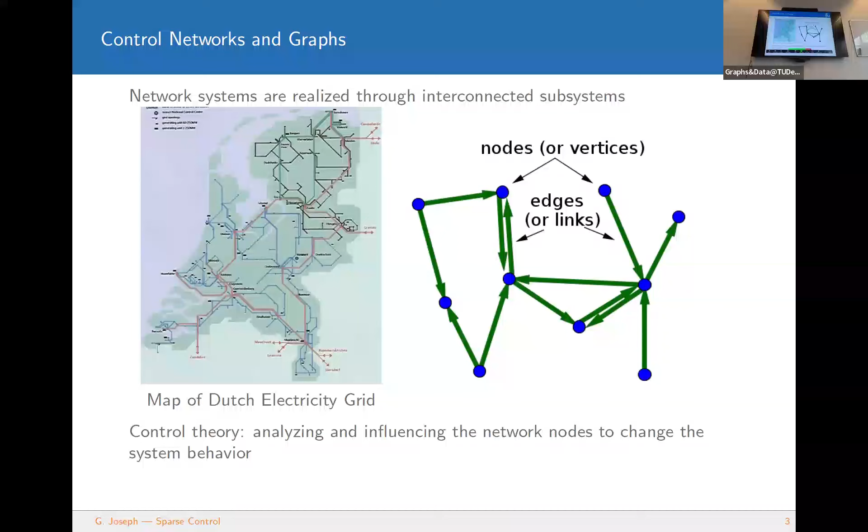We normally represent system evolution, or how the data changes over the networks, using a linear dynamical system. It's one of the simplest systems which can capture how data changes over time. We particularly stick to the state space model, which consists of two equations: a state evolution equation and observations. State evolution will tell how the state of the system changes over time, and here K represents the time index. Think about a network where xk corresponds to the signal that you observe at every node of the network, so the number of nodes will be equal to the dimension of xk. As time changes, the node values will change.

It can change due to two reasons. One is because of the interactions among the nodes: one node can interact with another and change that other node, and that interaction is captured by the first term here, A times xk minus 1. The second term, B times uk, is the application of external controls, something like applying a drug to your body, which changes the innate behavior of the system. So there are two components to state evolution: the first is an innate behavior, which is A times xk minus 1, and the second is external control, which is B times uk.

This can be easily captured using a graph. Think about xk as a vector, where one entry of xk represents one node in the graph, represented by the blue dots here. And xk depends on xk minus 1, the state of the system at the previous time, because the state is changing over time, and that dependence is captured using this matrix A. So here you can see that if the state of node, let's say, A32 is non-zero, which means that the state of node 2 will influence the state of node 3 at time t, that's why you have a connection which connects x2 and x3.

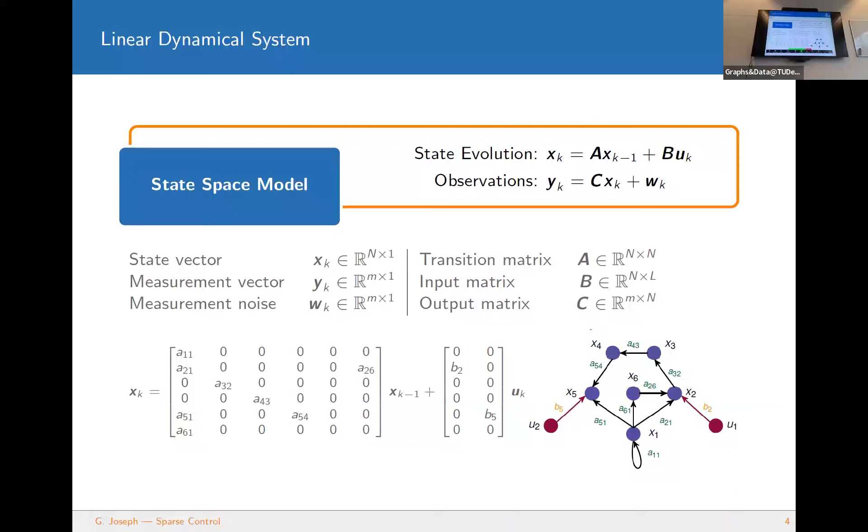Right, so to understand this, let's look at an example. Think of a social network. A social network is basically a collection of people. Here, a node represents a person in the network.

So every person has an opinion, and the collection of all the opinions will represent the state vector.

And then there is a transition matrix, the A matrix, which will tell how these people would influence each other. People will talk to each other, get new perceptions, new insights, and change their opinion over time. That is what is captured by this A matrix, which represents social connections. Social connections could represent people living in an area, people working for a company, or a social media group where people discuss things. It could represent different things in different contexts. So this A matrix represents these connections, how the different nodes are connected to each other.

And then there are some external inputs. External inputs could be social influencers, people who want to influence opinions deliberately. This could be a marketing agent who would come and talk to you about a particular product and say good things about it, or somebody who would give you a free sample of a product to test out and see if you like it or not. So these are some external inputs. These are not unbiased opinions, but people who try to bias people. That could be an example of a social influencer.

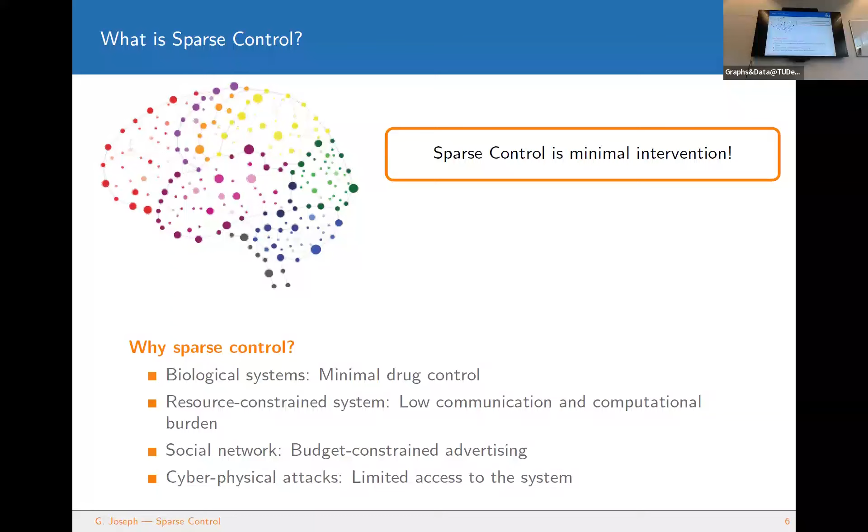Oh, now it should work.

And what is sparsity? Sparsity basically represents a control vector with lots of zeros. Think about a system with a lot of actuator possibilities—for example, the social network case, a lot of people, and you want to pick and choose a few people who can influence the entire network. The people you would choose will have a non-zero control and the others will have zero control. For example, a kindergarten child will have zero control because he has less influence in society compared to somebody like the dean of electrical engineering, who will have a better say in certain things.

So basically, if you look at the control vector, it's a big long vector with mostly zero entries, which means most of the nodes are uninfluenced and only very few will have non-zero entries. That's one good thing about sparse control itself—it admits compact representation. If you want to represent a big long vector, you don't need to store all of them; since most are zero, you can store it very efficiently. That saves, for example, low communication costs when you try to transmit over a band-limited signal.

So what does this talk discuss? This talk is about sparse control in discrete time linear dynamical systems, where we ask the following questions. The first question is: we have a system with a lot of actuators, a lot of possibilities to control the system, but we use only a few of those options. Does it actually work? Is it possible to get any desired behavior, or is it possible to control the system using only a few nodes? That's the first question we want to address.

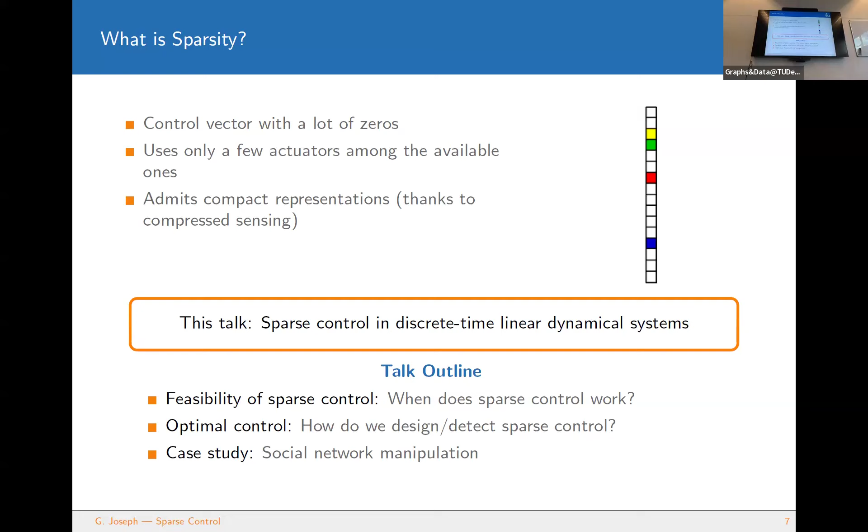We also look at a small case study of social network manipulation using sparse control. So this is how we have organized the talk for today. Any questions so far? All right.

Okay, let's revisit our math equations. We work with a state space model, where we look at the state evolution equation, described by x_k equals A times x_k minus 1, plus B times u_k. We are looking at sparse control, which means we assume u_k, the control input, is sparse—meaning the L0 norm of u_k is much less than the size of u_k itself. We can think about two types of sparse control: one is time-invariant, and the other is time-varying support.

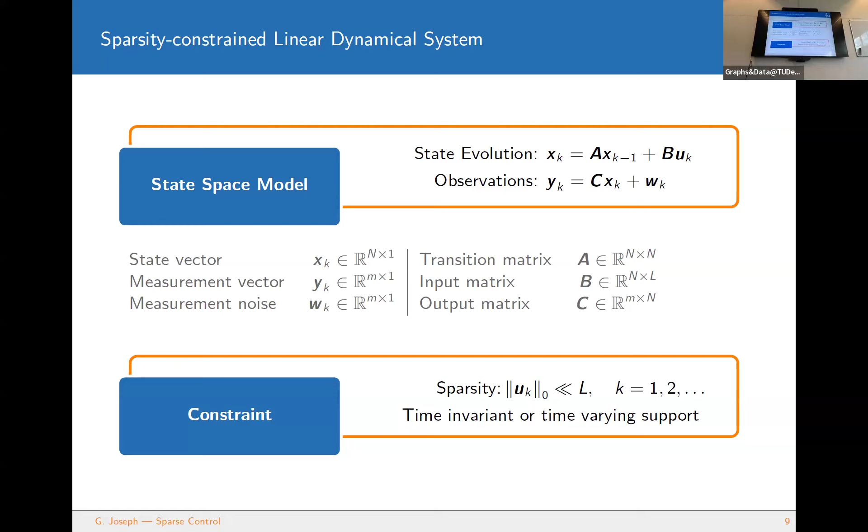In the time varying case, people can choose different non-zero values across time. At first time, we pick 3 people and make sure everyone else is 0. The next time, we influence 3 different nodes and make sure everything else is 0. So you choose fewer people, but over time you choose different sets of nodes. That is what we mean by time varying case, versus time invariant case where we just pick a few among all available options and always use non-zero control only using those nodes. These are the two different cases we're going to discuss today.

Let's start with the formal definition of controllability from the control theory literature. Given a linear dynamical system, it is said to be controllable if using a set of admissible controls, we can start from any initial state x0 and achieve any final desired state. If there exists such control inputs, then we call that system controllable.

Mathematically, let's say you start from x init, the initial state from which we are starting, and we want to move to x final, a given final desired state. For example, in the case of a marketing agent, before the product is launched, nobody knows about it, and you can think about the state of social opinion as a 0 vector. Your goal, x final, is to make sure everybody buys it or has a good opinion about it. So you can have a desired final state.

If you use the linear dynamical equations, you can see that x final and x initial are related with the control inputs using a matrix called the controllability matrix. This matrix has different powers of A, with terms like A power K minus 1 times B, A power K minus 2 times B, all the way to B, where B is the input matrix and A is the transition matrix.

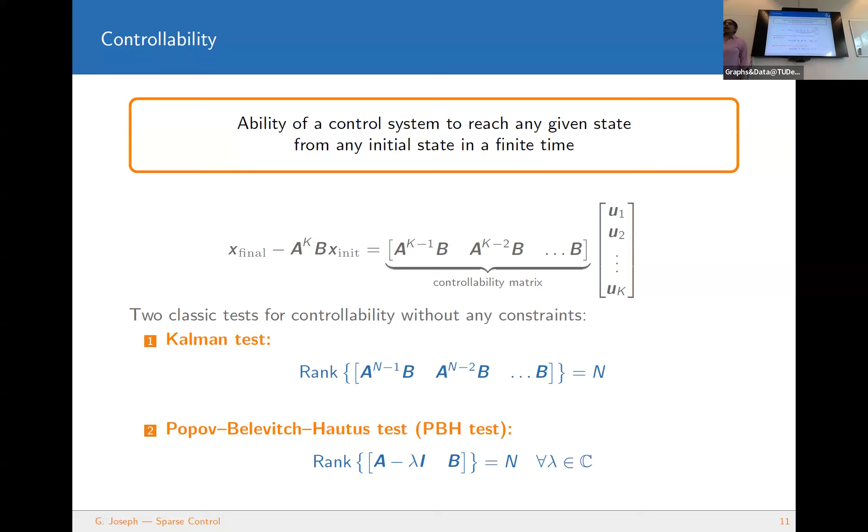We'll first look at the time invariant case, which means all the UIs will have the same support - the non-zero entries will have the same indices over all the UIs. So what happens in that case? Let's assume the support of UI, meaning the indices of non-zero entries of UK, is fixed - that's a set S, a subset of all possible options.

So you have n entries in UK, and we choose a small subset of that, activating only those subsets every time. What happens is you can replace U1, U2, all the way up to UK with only the non-zero entries, because all other entries are zeros, and when multiplied with this matrix, they have no effect.

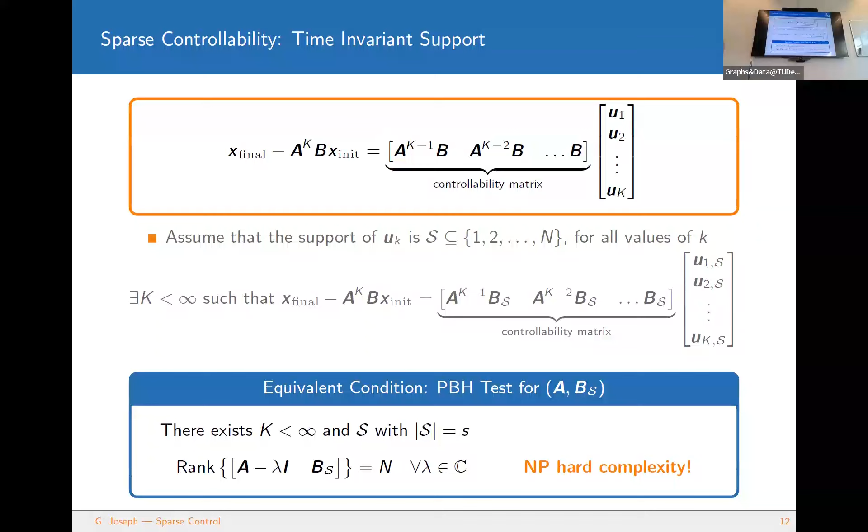And if you want to check whether it's possible to control the system with N_S inputs, then we have to check whether there exists an S such that this condition is satisfied. That is a straightforward extension of classical control theory. But this works only if the support is time invariant, meaning we choose the same subset of actuators at every time.

Now let's look at the time varying support case. Here, each of the UKs is sparse, but they have different supports, and the supports can change over time. Let's say the support of UK is SK, which depends on K, and we'll look at the controllability condition here. Every time you choose a different support, the first B gets replaced with B sub S1, the second B gets replaced with B sub S2, and so on. Therefore, it doesn't have a pattern similar to what we had earlier.

We want to make sure that there exists an S-sparse vector which would attain controllability. So this system of equations should be solvable for some SK. That's the goal that we have, and we have different options for SK.

If you look at the span of this matrix over all possible values of SK, then we get a finite union of subspaces, which means at one time you can pick a fixed number of supports, so we can choose S1, S2, all the way up to SK minus 1. That will give you a matrix, and it will have its own column space. Then we have different options for each of these SKs.

If you have n entries and you choose S out of n entries, there are n choose S options to do that. So for every different option of SKs, we can construct a different controllability matrix, if your only constraint is that your UK should be sparse. So for every UK there can be n choose S options for its support.

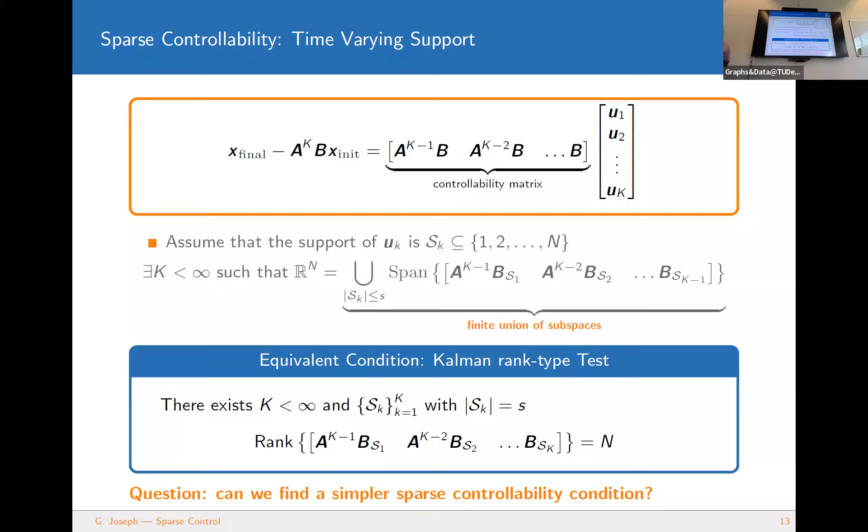But there is a problem with this condition: it's hard to evaluate. If I have a system and I say I want to check whether it is S-sparse controllable, I have to run through all possible supports to make sure the condition is satisfied. This could be a combinatorial problem. So can we think of a simpler, equivalent condition where we don't have to do a combinatorial type of check? That's what we try to do next.

So for that, we look at some necessary conditions. Think about sparse controllability - it means a system is controllable using sparse inputs. If a system is controllable using sparse inputs, it should be controllable without the sparsity constraint, because controllability is a looser version compared to sparse controllability. If you can achieve something with an extra constraint, you should be able to achieve it without that constraint as well. So sparse controllability naturally implies controllability.

And therefore, we know that if the system is controllable, the PBH test should succeed, because that's a test to check whether the system is controllable or not. So we try to work on this.

Let's say a system is sparse controllable. We see that if the system is sparse controllable, the Kalman type test in the lower box should be satisfied. So if the Kalman type test is satisfied, there exists a K and a set of supports such that the rank of this matrix is equal to n. Look at the first few columns of this matrix.

We have an A sitting on the left side of all these columns, so we can say this part is A times some other matrix. In other words, the column space of the first few columns of this matrix is a subset of the span of A. So if I replace the whole thing with A, the rank is not going to reduce. So if the rank of this matrix is n, I can clearly say the rank of this first bunch of columns, replaced with A, should also be equal to n.

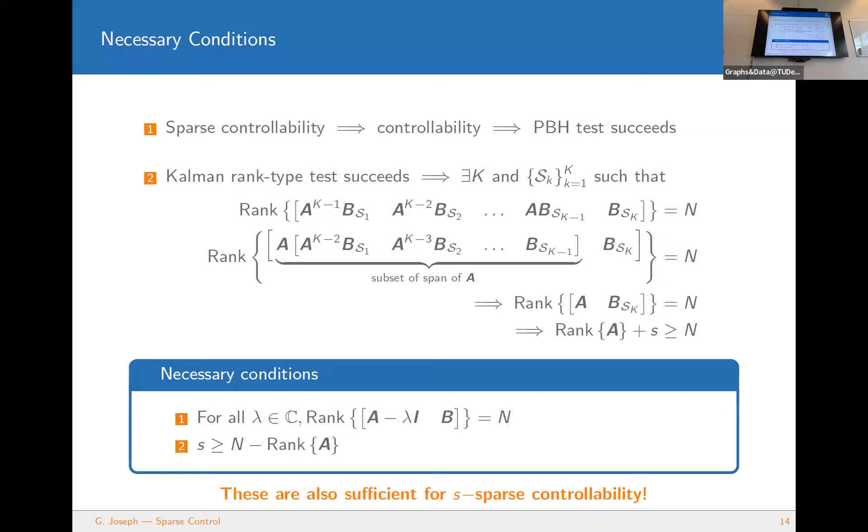However, this condition is only necessary - it's not sufficient. But we can prove that it is also sufficient. I'm not explaining the proof here, but we can show that these conditions are also sufficient for sparse controllability, which could be a bit surprising, but it's a very easy proof.

So to summarize, what we show is that a system is sparse controllable if and only if it satisfies two conditions. The first condition is controllability itself, which is pretty clear. The system should be controllable, and the sparsity level should exceed a particular level, which is the nullity of matrix A.

This is similar to the classical PBH test, and it is easy to verify. There is no combinatorial check.

So any system which is controllable is also sparse controllable, as long as sparsity exceeds a particular level. That's the takeaway from the discussion so far, which is a beautiful result because it tells us what is the minimum number of people that I should influence to make sure that I achieve a desired behavior, or it gives insights into how I design my sparse control if I want to achieve something.

If you go below this level of S less than n minus rank of A, then the system can be uncontrollable.

This leads to a couple of other interesting results, which I'll skip for today. For example, this can give something called a Kalman decomposition type procedure, which can separate our system.

Suppose the system is not sparse controllable, then we can separate the space into three different parts. One part which could be controllable. So let's say our S is less than n minus rank of A, which means the system is not sparse controllable. Then we can clearly identify which part of the system is controllable, which part is not controllable, and which part is not sparse controllable. So we can divide the whole state space into three different parts.

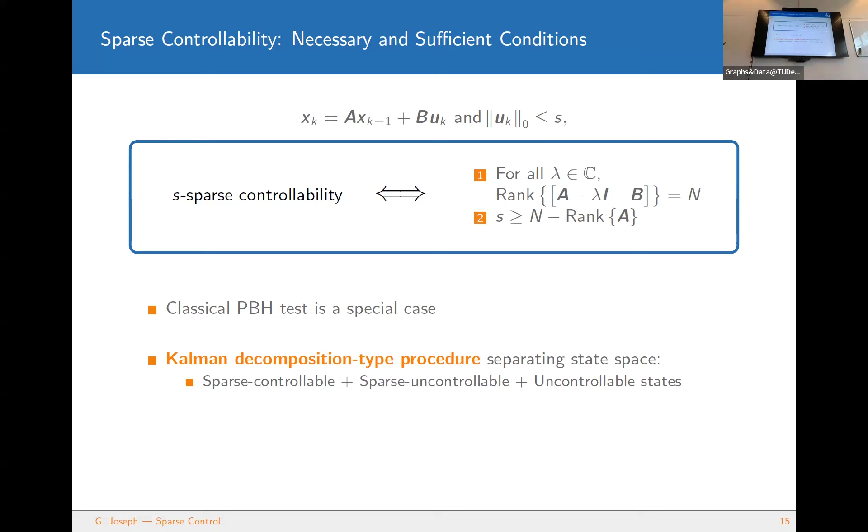I'll not go into the details, but this is one result. And we can also derive the number of inputs that we need to guarantee controllability.

So if you know that a system is sparse controllable, the next question is, what is the minimum sparsity level that we need? The next question is, how do we design the controller? How many control inputs do you need?

So that you can start from one initial state to arrive at another state, which is equivalent to this capital K in this equation. So how many control inputs should we apply? And there's a bound for that as well.

Interestingly, this is upper bounded by capital N, which is the state dimension of the state space. So if you're trying to control a system with n nodes, then we need to apply at max n sparse inputs to make sure the system arrives at a desired behavior.

That's the takeaway of the system. And this also matches the non-sparse case. So if we have a non-sparse system, where you can apply any number of control inputs, then n is the upper bound in that case as well. In the classical non-sparse case also, the bound is n.

If you have a sparsity constraint, even then you need at most n control inputs to ensure the system starts from a given initial state and arrives at another state.

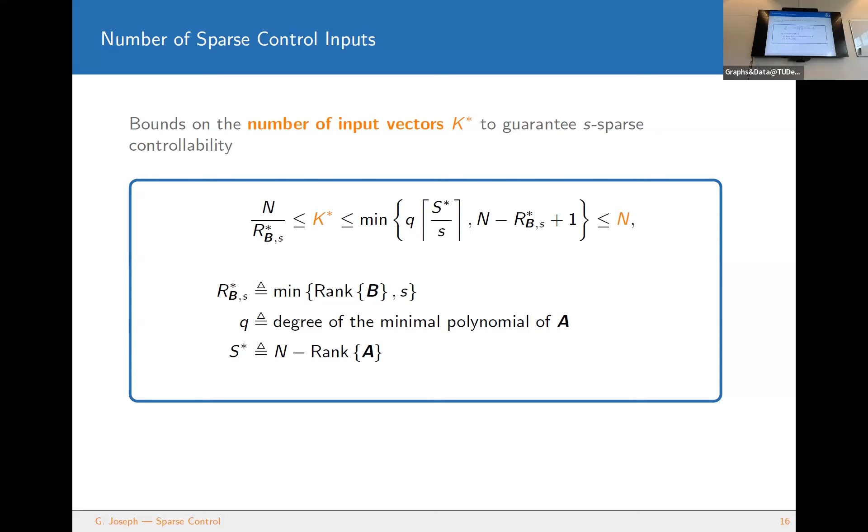We have derived a bunch of extensions for this result. So this is what we saw first: if we have sparse controllability with fixed support, we need a combinatorial check to ensure the system is controllable. But if we have sparse controllability with time-varying support, then the controllability test simplifies.

We need to check two conditions: controllability and a limit on the sparsity level. This could be extended in multiple ways.

One is non-negative sparse control, which means think of a system where you can only apply positive inputs. So the u_k's are not only sparse, but they only have positive and non-negative entries. This corresponds to a system like a radiator. If you have a bunch of radiators trying to control the temperature of a room, you can only give heat, you cannot take away the heat.

So in that case, the control is always positive, not negative. For such systems, if you also impose a sparsity constraint, you can show that non-negative sparse controllability is the same as non-negative controllability plus the same bound on sparse control. So that is another result.

Then we can think of output sparse control. At times we don't want to make sure the entire system is controllable, but that a part of the system is controllable. Think of an election campaign where the goal is not to get all the votes, but to get the majority of votes. There you don't want to control the entire system, but a part of it.

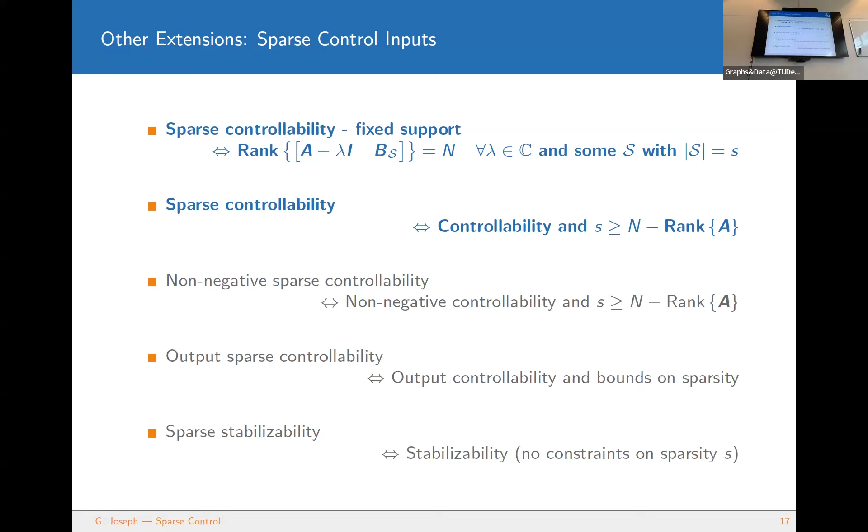How much more time do I have? Five minutes? Five minutes, okay. All right, then I'll skip these things.

Maybe a few words about design and estimation of control inputs. We have derived some conditions under which a linear dynamical system can be controlled using sparse inputs. And the next question is, how do we design such control inputs, or how do we estimate such control inputs?

Let's quickly look at the design problem. Given an initial and final state, how do you choose sparse control inputs? We recall that we need at most n sparse inputs to go from any initial state to any final state, as long as the system is controllable. Therefore, we can write this as a system of linear equations, where the only unknown is the set of sparse inputs that we applied. So we can just solve it using any least squares approach if there is no sparsity constraint on U.

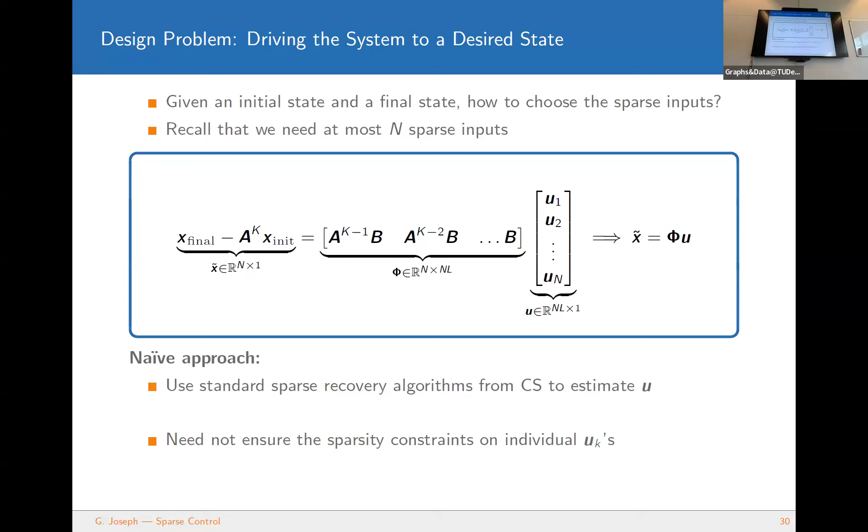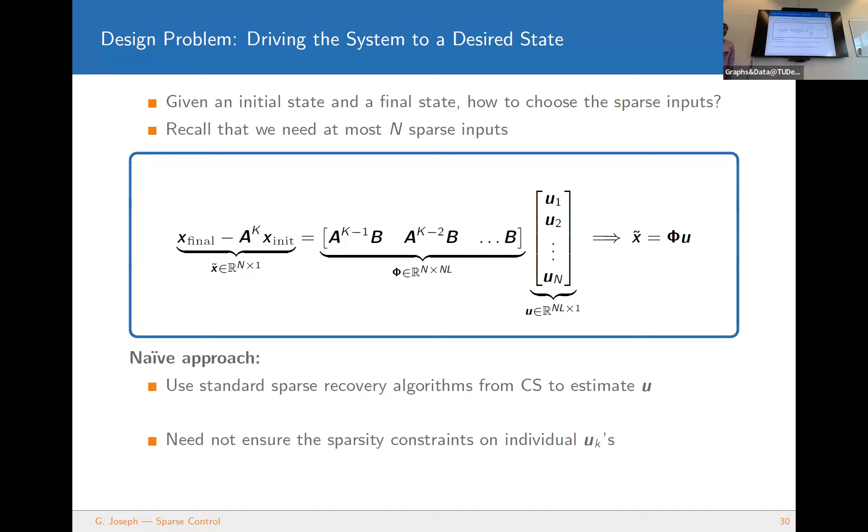But if we want to enforce a sparsity constraint on the control inputs, then we have to use other techniques. One naive approach is to use standard compressed sensing or sparse recovery algorithms. But the problem is it doesn't ensure that each of the UKs are sparse. In general, if you use a sparse recovery algorithm, it will make sure that the entire vector U, which consists of all the inputs, is sparse, but it doesn't ensure the individual sparsity on each of the control inputs.

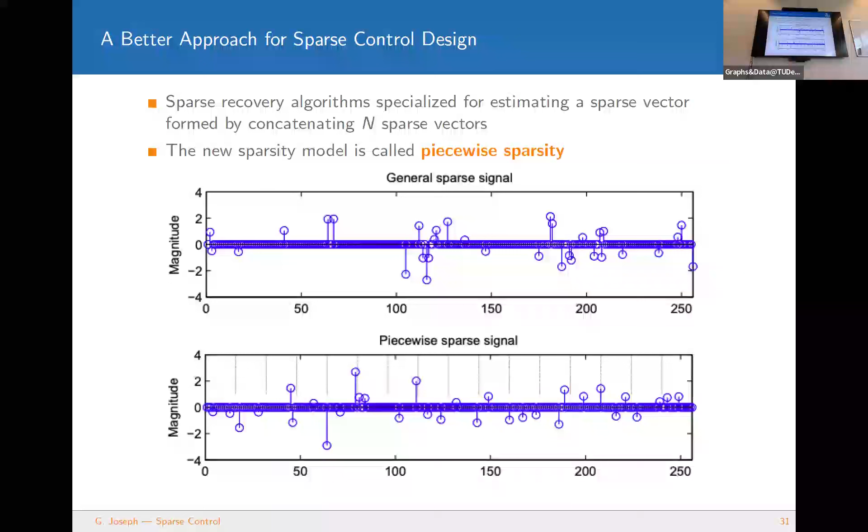Then we have to resort to more specialized algorithms. There is a notion called piecewise sparsity. What it does is it takes a big long vector U, divides it into small chunks, and ensures that every piece is sparse, which is what we want. If you look at this big long vector U, we want each of the UKs to be sparse, it should have at most S entries. So this leads to a special structure called piecewise sparsity, and there are some algorithms which can do this.

And if you look at the sparse control inputs with a common support, so if you assume that each of the U1, U2, all the way to UN have the same support, then we can use another type of sparsity algorithm. Think about this UK — this is U1, this block is U2, and this block is U3. The indices of the non-zero entries are the same: the first entry of U1 is non-zero, then the first entry of U2 is also non-zero, the first entry of U3 is also non-zero.

So what we can do is we can rearrange these entries. If we collect all the first entries of all the vectors, we get a block of non-zero entries. If we collect the second entries of all these control inputs, we get a block of non-zero entries, and so on and so forth. This particular structure is called block sparsity, where there's a big long vector, it is sparse, but the non-zero entries sit together, clustered together. You can use these kinds of algorithms from the compressed sensing literature to solve these kinds of problems.

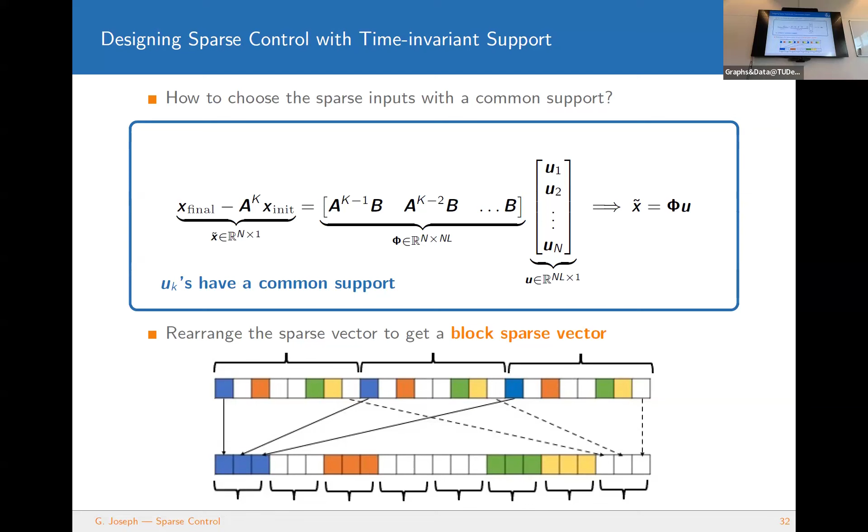A similar approach can be used for sparse input estimation problems as well, but we'll skip it. So these are the two types of sparsity patterns we discussed. The first one is block sparse structure, where there's a big long vector and the non-zero entries sit together, clustered together. This is useful to estimate control inputs with time-invariant support. And if the support is time-varying, then we have to use this particular structure called piecewise sparse signal.

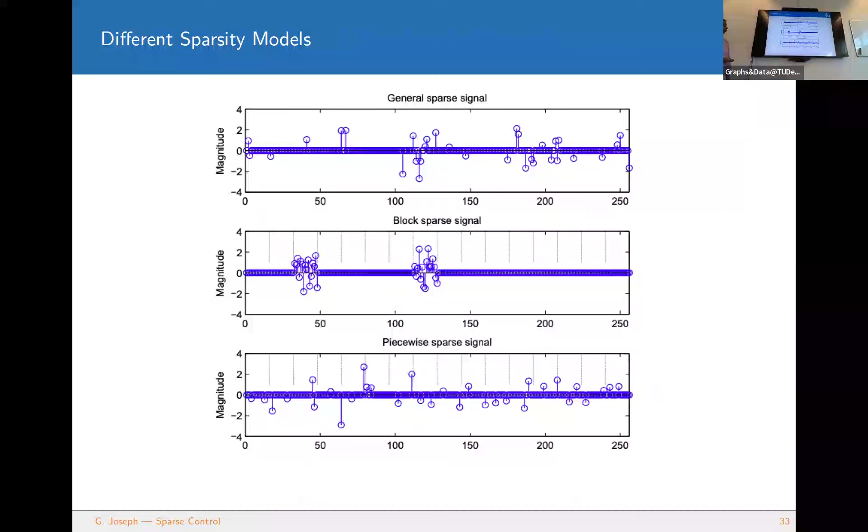To wrap up, there are two types of algorithms we can design for sparse control inputs. One is for time-varying support, where we have to use piecewise sparsity, and it has very limited algorithms — only 2 or 3 algorithms in the literature which can address this problem. It's an open area.

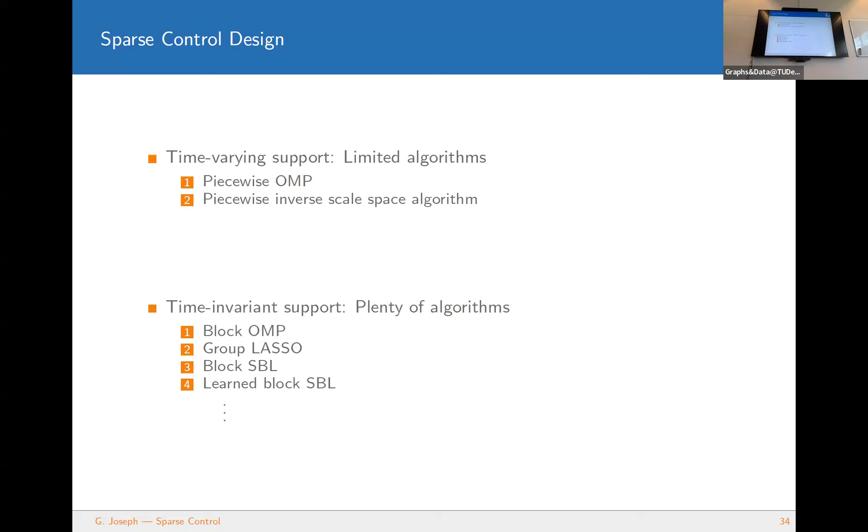And then there is a time invariant support, and there are plenty of algorithms which can handle block sparse structure. So to summarize, we looked at a linear dynamical system. We didn't look at the observations part yet, but we skipped it for this talk. But think about it, we discussed a state evolution model, and we looked at how sparsity would impact controllability of networks.

If you want to design the control inputs, in the non-sparse case, we can use a least square solution. But in the sparse case, we have to use specialized sparse recovery algorithms like piecewise sparse recovery algorithms or block sparse algorithms. Existence condition for non-sparse case, we have the classical Kalman and PBH test, and we need at most n number of inputs to achieve controllability.

Whereas if we have sparsity constraint and if it's time varying support, then we have to make sure that the controllability conditions are satisfied and the sparsity level exceeds a particular level, which is the nullity of matrix A. And we also need n number of inputs at most to achieve controllability.

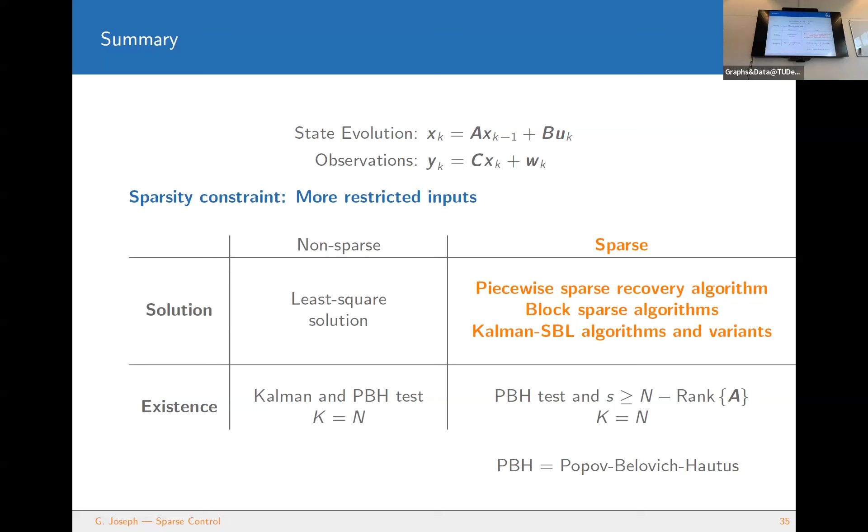Before I wrap up, I wanted to show you one more type of graph. We recently, people have started looking at something called structured linear dynamical systems. So what does that mean?

So in most cases in networks, we might know that two entities are connected, but it's difficult to quantify how they are connected. For example, you know that two people are friends, but you don't know how much one person can influence the other one. It's difficult to quantify such things. And for such graphs, we have something called structured graphs.

So we look at the system like xk equal to A xk minus 1 plus B uk. But A and B are not normal matrices, but rather we populate them with zeros and non-zeros. So we only know the system matrices up to their patterns. So if two people are connected, we put a star, and if two people are not connected, we put a 0. And if you're not sure whether two people are connected or not, then we put a question mark there.

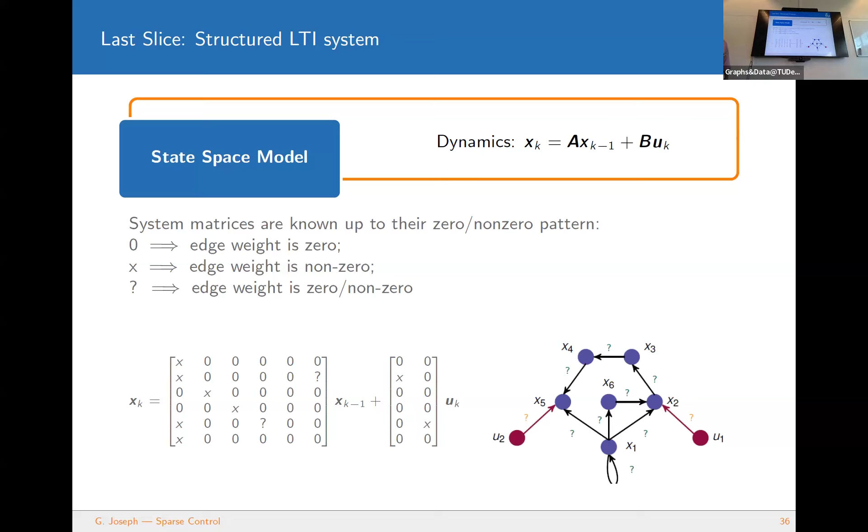So this is a pattern matrix. The actual A matrix will obey this particular pattern, but we don't know what the actual A matrix is. So these type of systems are gaining attention very recently.

And we can extend the notion of controllability there as well. And there it's called structural controllability. So a structural system is controllable. There are two types of controllability there. A structural system is controllable if at least one numerical realization of A and B is controllable.

So if you can think of an A and B which satisfy this pattern, and then the corresponding linear dynamical system is controllable, it's called structurally controllable. And there's a notion of strongly structurally controllable. So for every pattern, there are multiple realizations, right? And if the system is controllable for all such realizations, then it's called strongly structurally controllable.

And this is a new area which is gaining some attention, and this is really connected to graph theory and zero forcing numbers of graphs. There is no notion of Kalman test or PBH test in this case, but people use graph coloring based tests to check whether the system is controllable or not. But we can also think about this kind of sparsity constraints on structured systems as well.

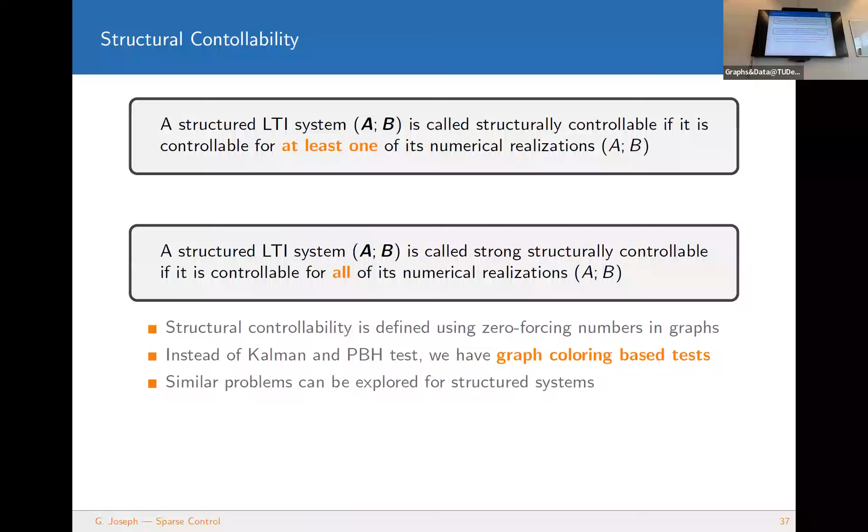Okay, so to wrap up, we have seen different types of sparsity constraint. There are some open problems, obviously. We considered only sparsity over actuators, which means among all possible control inputs, we only choose a few number of control inputs at a time. But we can think of sparsity over time as well.

So we don't have to apply a control input at every time, but we can think of applying control inputs for some time, switch off the system, then switch it on again after some time. So this notion is called sparsity over time. We can also think about sparsity over feedback control. And then we discussed piecewise sparse structure, and there are limited algorithms there, and that could be one open area.

And we can also think about if deep learning based algorithms can help there, because the classical or the model based algorithms are not very useful in that particular case. Another one is other applications. We primarily focus on social networks here.

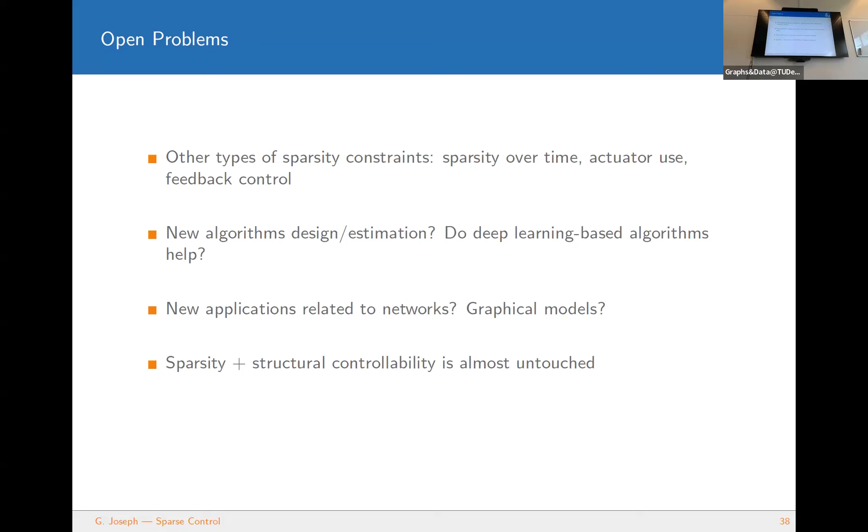And the last point is sparsity plus structural controllability is almost untouched. People have not started looking at that area too much. So even the whole area of structural controllability is new. So combining it with sparsity is a completely open area.